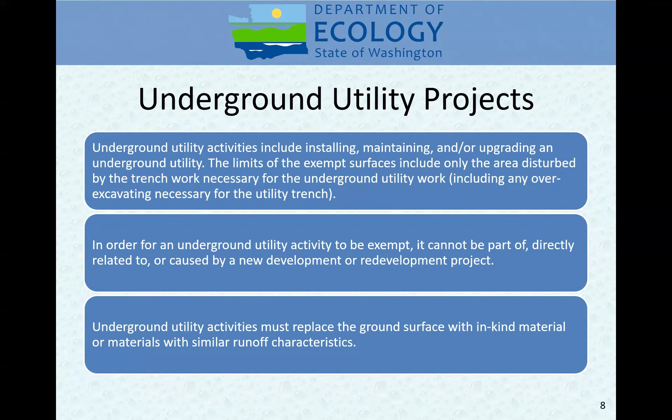So it must be the project all by itself, and it must replace it with in-kind surfaces—you can't put a trench in a gravel road and put asphalt back over the top. You probably won't do that, but it has to be in-kind. So there we are—that's my soapbox on underground utility projects. You can tell it's important to me.

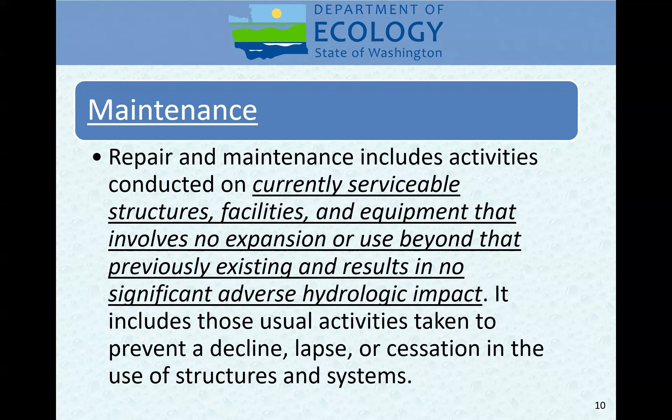Maintenance, you're taking care of existing problems in your surfaces, asphalt, concrete, whatever the surfaces are, but we're not increasing the size of anything. We're not doing anything new, we're not going down to base course and bringing the roadway back up. We're doing maintenance activities, making it so that whatever it is can last longer and work better by having this happen.

So what are these activities that we identify as being maintenance activities? These are actually listed in the manual. This is a copy of the bullet points we have listed in the manual: pothole patching, square cut patching, targeted preservation work, overlaying, including grinding and overlaying, so long as the base course

is not exposed. So if you want to grind 6 inches of asphalt down 2 inches and replace the top 2 inches, that's maintenance. You can do that from curb to curb. You can't extend it any - that's not maintenance. But you can go from curb to curb with that. You can overlay it.

Shoulder grading - if you have a road with a shoulder and you need to grade it, that's fine, you don't have to do anything else. Reshaping, regrading drainage systems, including curb and gutters, crack sealing and maintenance, and vegetation maintenance within the right of way.

We've also done a little expansion - when you're doing square cut patching or grinding and overlaying, if you're doing these maintenance activities and coming up against corners that are currently curbs, and you need to, because you're under a federal, state, or jurisdictional mandate, to replace the existing curbs with ADA curbing, you can do that ADA curbing as well. We consider that part of the pavement maintenance.

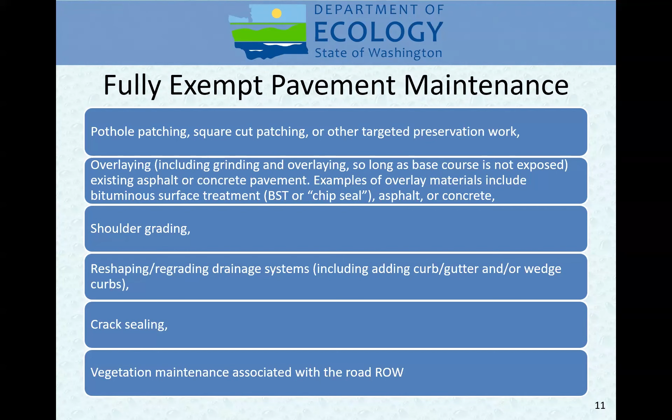I'm sure there's going to be questions about this. So, pavement maintenance subject to core element number 2: removing and replacing concrete or asphalt roadway to base course or subgrade or lower, without expanding the impervious surfaces, and repairing the roadway base or subgrade. These are not fully exempt, these are partially exempt - you need to do core element 2 when you're doing this.

So you can go into a road and from curb to curb, take it down to base course and replace all the asphalt from curb to curb and move forward. That's still considered maintenance in Eastern Washington. In Western Washington, that's replaced impervious surface, but in Eastern Washington we still consider that to be maintenance. So you can go down to base course and rebuild the road, but you can't expand it.

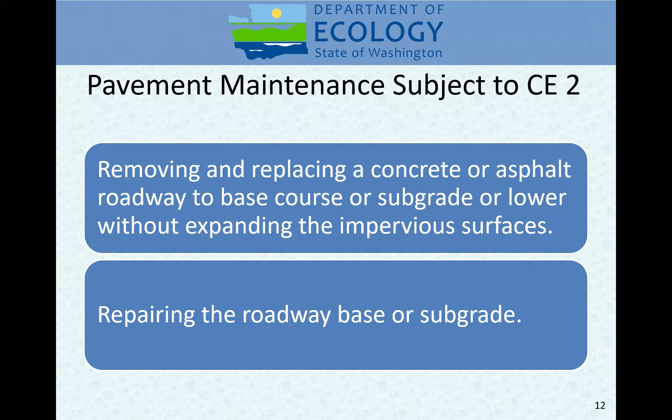This is the idea that the road is in such bad shape that square cut patching and other methods just aren't going to work. The existing asphalt is only an inch or 2 inches thick, and grinding isn't going to work - you're just going to have to take it out. Well, we're still saying that's maintenance for you. You still have the ability to do that as maintenance, except you need to do core element number 2 while you're doing that.

Other pavement maintenance items subject to core element number 2: overlaying existing gravel with asphalt or concrete without expanding the area coverage, or overlaying BST with asphalt without expanding the area coverage. So what you're doing here is taking an existing road that may be gravel or BST, and replacing it with asphalt, a surface that is much more impervious.

I know we call gravel impervious, and there's all kinds of complaints about that, but gravel is impervious because we're looking at the future when the gravel has been torn up and broken. The way runoff from gravel roads gets away from the right of way, and the way runoff from impervious surfaces like asphalt gets out of the right of way, is different. So we want to make sure that if you're changing the runoff characteristics to that extent, you're doing appropriate stormwater controls for those things. You can do that if your roads are subject to traffic volumes that are low enough.

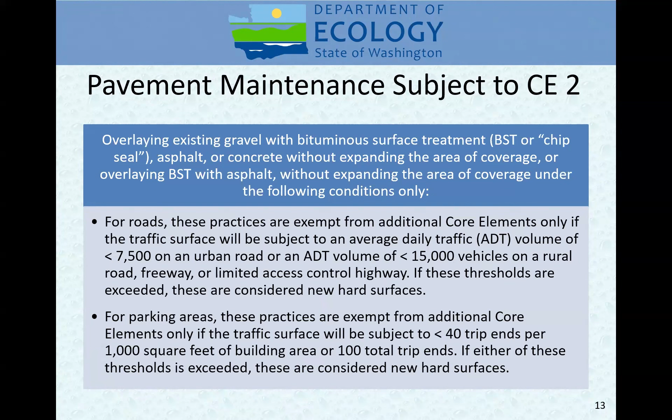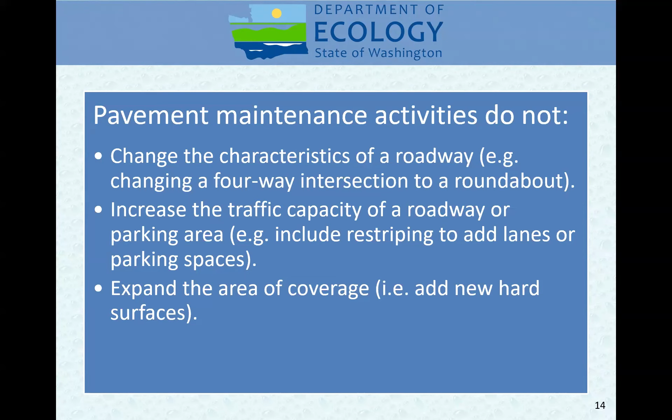Now, what do maintenance activities not do? They don't change the characteristics of a roadway, like changing a 4-way intersection to a roundabout. They don't increase the traffic capacity of a roadway, and they don't expand the area of coverage. So if somebody has a project and they are doing one of these things, you'll know they're not maintenance.

All right, so let's talk about thresholds. Yay, project and core element thresholds. As I said before, we've eliminated the regulatory threshold. We established a new redevelopment boundary when you go from new to redevelopment at 35% impervious on the site. We're establishing thresholds using hard surfaces now, and we've got some secondary core element thresholds that we're bringing into play now that we didn't have in play before.

So when you're looking at a project and you're wanting to go through the flow charts and determine what core elements you have to meet and what surfaces you have to meet them for, they're going to be very different under the 2024 permit and manual than they were under the 2019 permit and manual. So let's get into some definitions here.

Hard surface is an impervious surface, a permeable pavement, or a vegetated roof. I talked about that earlier, that we're trying to make sure people don't try to sneak out of exceeding the 5,000 square foot impervious surface threshold by putting in permeable pavement. So now we've got a catch-all of hard surface and replaced hard surfaces. These definitions again are in the glossary. If you don't want to come to this presentation, but you want to go to the glossary, that's where I suggest you go.

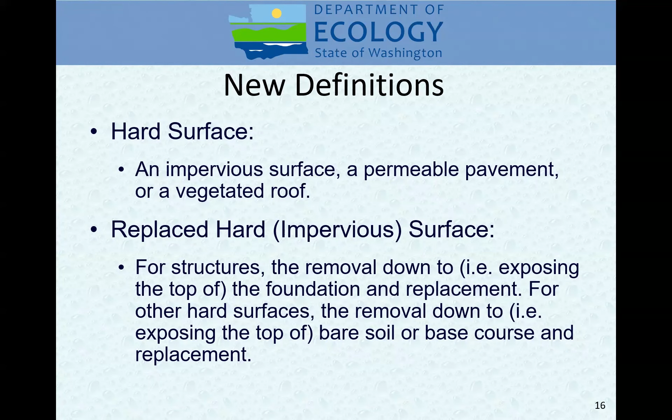Because of the maintenance definition there of replacing hard surface and only requiring core element 2, we're not trying to make things complicated, but we want to make sure you know what these definitions are. These definitions are going to be at the flowcharts, and they're going to be numbers that you have to generate as you start doing your project, so you can go through the flowcharts and determine what core elements you have to meet.

So here's the new development flowchart. It's revised from what you saw before. It's pretty straightforward. The first question is, does stormwater runoff from the project site discharge to a class 5 UIC well?

And all is the key term here. If your project sends all the runoff from your project site to a class 5 UIC well, then you need to follow the UIC rules. You need to go to chapter 5 of the manual and follow those rules, and you don't need to follow the permit. You don't need to go through the thresholds. You don't need to go through the core elements. Everything you're doing is under the UIC rule.

You're putting in treatment under the UIC rule, and you're registering your UICs under the UIC rule, and you're meeting all of the non-endangerment standards, and you're meeting all the requirements for deep UICs if you have a deep UIC, and all the other requirements that are in the WAC for UICs that aren't there for a permit. I have a little bit of discussion later about why we're doing this.

So if you answer no to that question, and you're not putting 100% of the 100-year storm into UICs, then you're going to be covered under the permit and have to do the core elements.

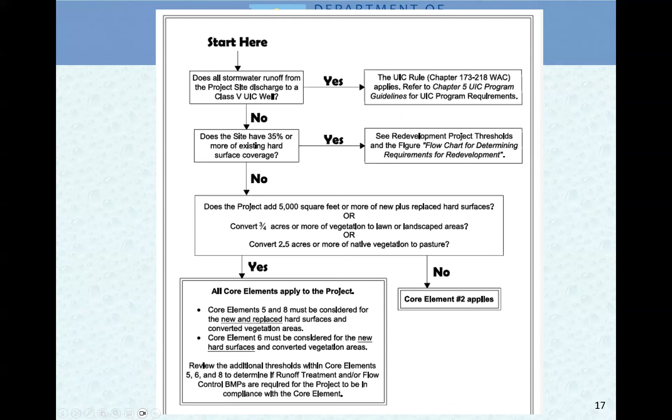The first question on the other flowchart—going back—was new and replaced hard surfaces. What we're doing on the redevelopment flowchart is we're only asking about new hard surfaces up here, so it's a little different. If you answer yes to that, you get the same answer here, only you have to do steps 5, 6, and 8 for the new hard surfaces and converted vegetation areas. Previously it was new and replaced for 5 and 8, and new for 6. Now it's new for 5, 6, and 8, and it doesn't say anything about replaced there.

What we're going to do with the rest of this flowchart, beyond this question and this answer of no, is decide whether we have to do flow control and treatment on the replaced hard surfaces. Again, we're trying to get people to do infill, and if they don't have to do flow control for the replaced hard surfaces, that makes their stormwater cost less and makes them more likely to want to build internally.

So the next thing we do is look to see: do I have a road-related project? Let's assume it's a subdivision or commercial development, so I answer no there, and look at whether the new plus replaced hard surfaces are 5,000 square feet or more. Now we've added replaced hard surfaces to that question above, so we might have answered no to this one but yes to this one, or yes to this one down here.

And does the value of the proposed improvements exceed the assessed value or replacement value by 50%? Have they made that site more valuable? If all they're doing is replacing asphalt in a parking lot, they haven't made it more valuable—why would we ask them to do stormwater controls on a surface that's still the same as before? We don't want to make them do that. But if they're putting a building on that site and it becomes more valuable, we want them to do stormwater controls there. So we're asking, have we increased the value of the site by a certain amount?

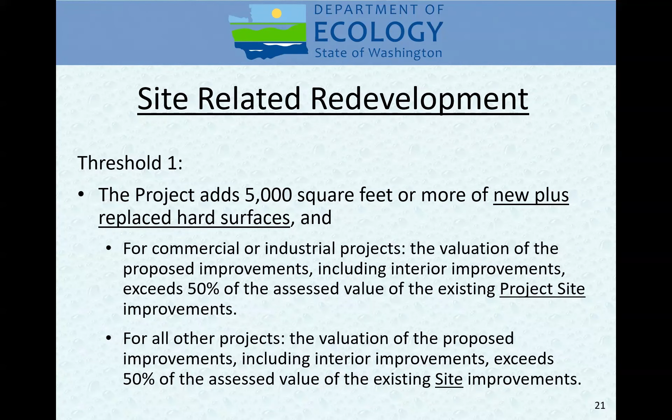This is what that first box was asking us: do we have more than 5,000 square feet of new plus replaced? So if we only had 3,000 square feet of new and 3,000 square feet of replaced, we answered no to that first one, but now we're answering yes. And if we answer yes to this, we go back and we have to do 5 and 8 for the new and replaced, and 6 for the new.

Threshold number 2 was that bottom box, and now this is for commercial industrial sites. Are we adding more than 5,000 square feet? And does the new plus replaced total 50% or more? You've got to do both. And if we do both, then we've added 5 and 8 to the new plus replaced.

That's taking us through those boxes in the flowchart. So each time you hit a box in that flowchart, you now have to determine: do I meet what's in this box or not? And if I do meet what's in that box, I have to add something.

Let's go back to the flowchart. So I come down to this box, I'm down in this box. Do I meet both of those things? If I do meet both of those things, I'm coming down here and I'm adding replaced hard surfaces. I've already got the new hard surfaces up here, or I may be going here and missing that, but now down here I've got yes, I have to do both the new and replaced for 5 and 8, and the new for 6.

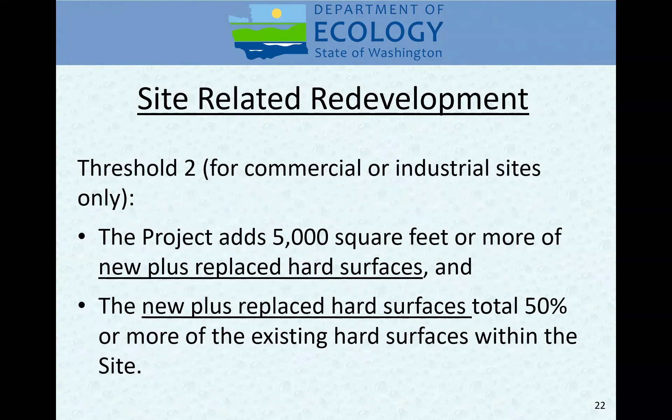So for road-related projects, if they meet both of these thresholds, I've got to do core elements 5 and 8 for the new and replaced, and core element 6 for the new.

There's a lot of new stuff for you to deal with, to decide whether your heads are up for it today or not. It's very confusing, it's very new to you. It's been in place on the west side of the state since 2001, so they're very familiar with this, and we still get questions of how to follow the flow chart fully. So it's not something you can pick up in a day. It's something you have to look at every single project individually. There's no generalization here. These are very specific, and you have to look at the numbers for each project.

So this is something the design engineers are going to need to get used to, because they're going to have to start building in their report these tables of types of surface and the amount of those types of surface. They no longer have just, am I bigger than 5,000? Yeah, okay, I got to do it. Now, depending upon how big you are and where you are and what you're doing, you may very well have to do different things, and you may be bringing in different things.

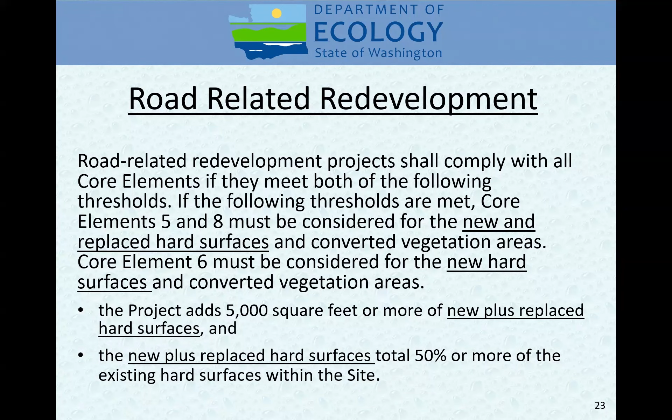Okay, so let's get away from those thresholds. Let's set those behind us and pretend we all understand them completely and don't have anything else to do with them.

So let's talk about our new core element 8. Core element 8 is on wetlands. Ecology has a group of people in the section, the shorelands and environmental assistance group, that are focused on wetlands. And they have told us that we need to start looking at wetlands across the state to deal with impacts on wetlands of new and redevelopment.

So we have elected to do that through the generation of a new core element 8. And if you remember what we talked about in the thresholds, core elements 5, 6, and 8 - for 5 and 8 you need to do new and replaced hard surface, and for core element 6 you only need to do new.

So we've brought that into the threshold calculations. And what we've done to help people figure out how to deal with wetland protection is we've created a new appendix, 2D in the manual, discussing wetland protection guidelines. Some of the standard guidelines you need to be aware of at all times: there are wetland buffers, and the buffers change size depending upon the value of the wetland. Buffers can be as much as 200 feet in some cases, depending upon the value of the wetland.

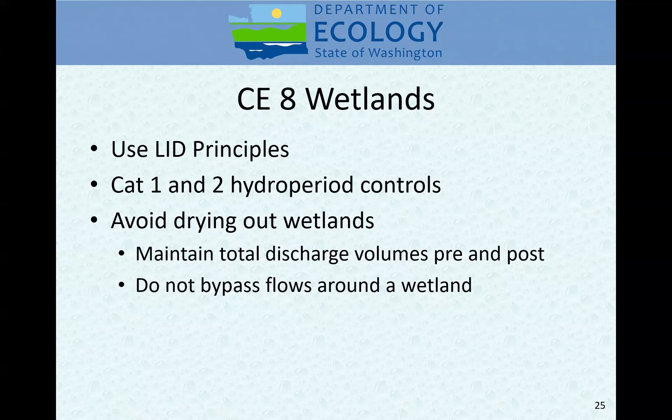There's some other things we wanted to talk about. In the manual, we don't have strict guidance for these things yet, but we want to let people know that we are aware they're happening and we are doing things about them. One of those things is climate change. We are aware of climate change, and we don't know what's going to happen, what climate's going to be like in the future.

So we are working with the University of Washington to see if we can get help identifying what rainfall is going to look like in the future, how much rain we want to get for various return events. We've just started a contract with the UW climate people to take their projections—they've made a number of rainfall projections based on different assumptions about the ozone and the climate and how things are going to change—and we're asking them to take their big projections and make them smaller ones so they can relate to Eastern and Western Washington.

What we're putting in our recommendations at this point is that we're asking jurisdictions to begin thinking about preparing for more extreme events. We're not telling them what size that extreme event should be—we're asking UW to help us determine that. It's not our place yet to do that; Ecology doesn't have enough knowledge to do that.

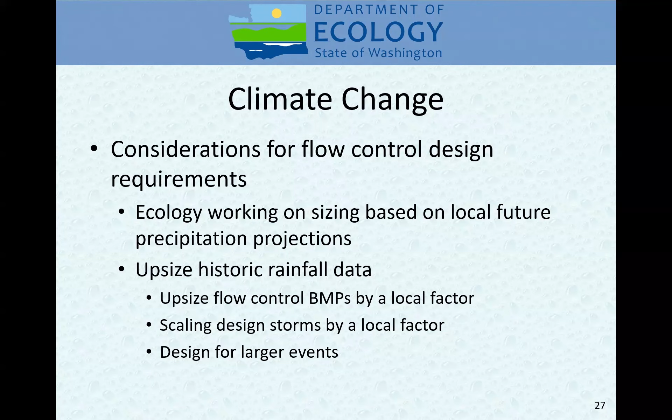We're getting it developed statewide all at once, so we will be able to release everything at one time. DOT will have their information statewide at the same time as everybody else gets theirs. So climate change, we are working on it. I don't know when we're going to have an answer, but we are working on it. Our contract with UW is for 2 years, so I wouldn't expect much in less than that.

We also are discussing nutrients and toxic organics. They're big in the news today. 6-PPD and 6-PPDQ is very big in the news, killing Coho salmon. It's nationwide, it's ubiquitous, and it's everywhere. A lot of parts of the country don't really care about it right now because they don't see it as toxic to the fish species that they have. However, it is toxic to those fish species, whether they believe it or not. So most of the country isn't jumping on the bandwagon quite like Washington State is.

We've got lots of studies going on. We're trying to determine how to deal with it. We just don't know enough about 6-PPD to say what we can do about it. We have no idea what concentrations we should be expecting from different land use types, or what concentrations of 6-PPDQ we should be removing in order to protect aquatic life. We don't know what BMPs can treat it and how well they can treat it. So we can't really say you must treat for 6-PPD and then say, oh, well, we don't know what you can use, but you've got to do something. That's not fair to you. So we're trying to figure out how to give you the correct tools, tell you what tools there are, and how to size and use those tools appropriately.

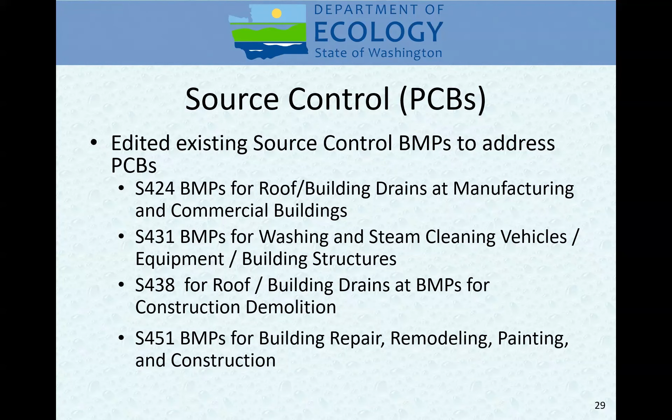We have a high performance bioretention soil mix that was identified and developed in the early 2020s. We put that mix in the emerging guidance at that point in time, and in the 2024 manual we brought that mix into the manual. We now have this in addition to the default mix for bioretention soil media.

It's for use when you have phosphorus issues with the water that has gone through the bioretention. If you don't have phosphorus issues, we suggest you use the default mix—it's much less expensive and much more available on the east side of the state. We've been trying to obtain HPBSM in Spokane for a grant project and have had a great deal of difficulty, and it's much more expensive. So at this point in time we don't recommend you use it unless you absolutely have to, but it is in the manual.

The bioretention BMP section of the manual contains the information you need to design a bioretention facility, regardless of what media you're planning on using. All the media use the same default infiltration rate, same reduction factors, same sizing, same slopes. They all use the same design criteria, regardless of which mix you have.

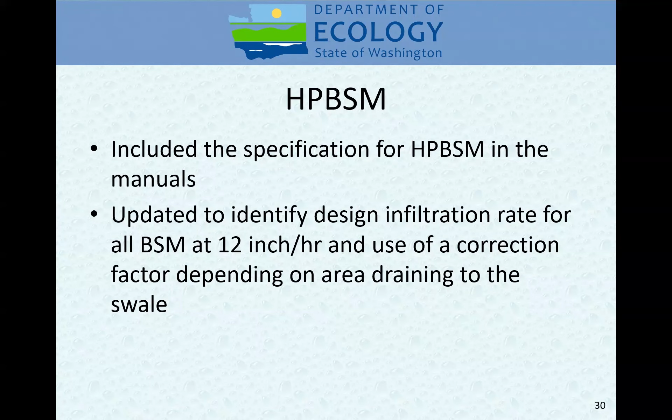And then in our UIC, we've added much guidance for UIC. We've updated it a lot for clarity, and we've added language for deep UIC wells. Deep UIC wells are wells that are poked through a confining layer, not necessarily 20 feet deep. If there's a confining layer 4 feet below the surface and you poke your UIC through that into the aquifer underneath, that's a deep UIC well. And there are a lot of new requirements for that.

And those requirements, the language of those requirements, were negotiated through the Association of Water and Wastewater Districts. So we've confirmed with the Association of Water and Wastewater Districts and Department of Health that the language we're putting in there, they consider protective.

So questions on that last little bit of changes, and from here I'm going to go talk about UICs. Underground injection controls are governed by WAC 173-218.

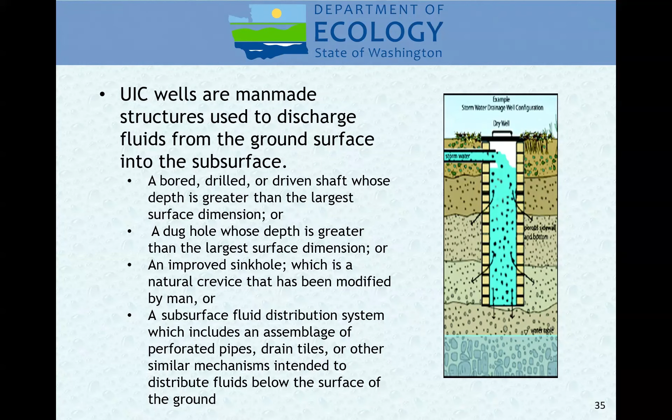If it doesn't have a perforated pipe in it, it's not a UIC. So if you have a trench filled with sand, and a pipe coming to it that stops as it enters that sand trench, water moves through the sand slowly, driven by the head developed at the end where the pipe comes in. That's not a UIC and doesn't need to be registered. But if you have a perforated pipe in there that takes water the entire length of the trench and uses the entire length for infiltration, you then have a UIC.

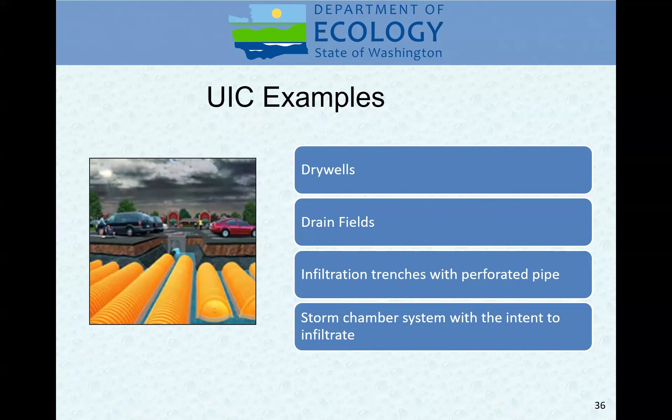Typical UICs are dry wells, drain fields, infiltration trenches with perforated pipe, and storm chamber systems with the intent to infiltrate. So these chambers, if you're using them for infiltration, they are considered UICs. If the ground is such that you can't infiltrate, and these are being used for storage as a detention system, these are not UICs. You have to be doing infiltration in order for these to be UICs.

Not UICs: buried pipe or tile networks that collect water, like an interception drain. So you have high groundwater on a site, and you're building a building with a basement, and you want to intercept the groundwater before it gets to that basement. You put a trench in the ground, fill it with sand, put a perforated pipe in that, collect the water you've intercepted, and drain that to the surface. That's not a UIC. Water's going the wrong way. A UIC requires water going into the perforated pipe and then into the ground. If water's coming from the ground into the perforated pipe and out to the surface, that's not a UIC.

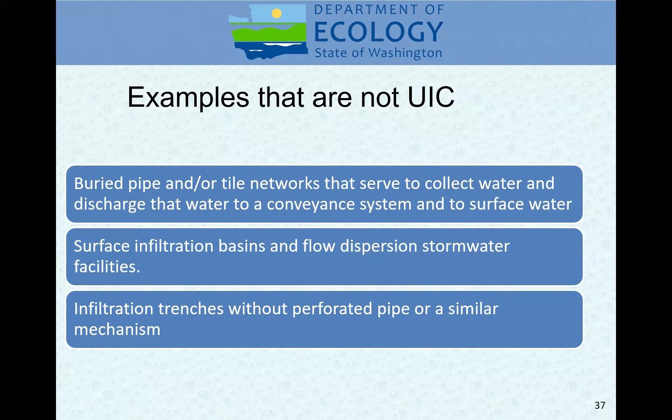A surface infiltration basin, or infiltration pond, has surface dimensions larger than its depth, so it's probably not a UIC. And if you don't have a perforated pipe in the infiltration trench, you don't have a UIC.

We manage stormwater here in Washington State one of two ways: through the NPDES Municipal Storm Sewer MS4 system, and/or the underground injection control. The UIC program manages infiltration of various liquids being put into the ground, not just stormwater. Our interrelationship is with the UIC program's class 5 UIC wells, as opposed to all of them. So UIC covers many more things than just stormwater, and the two programs do overlap.

The UIC program states that you should get the design, construction, operation, and maintenance information from the stormwater manual to fulfill their AKART requirements - all known available reasonable treatments. The requirement is to meet AKART, and if they use the BMPs in our manual to meet the UIC rule, then the UIC rule's requirement for AKART is met.

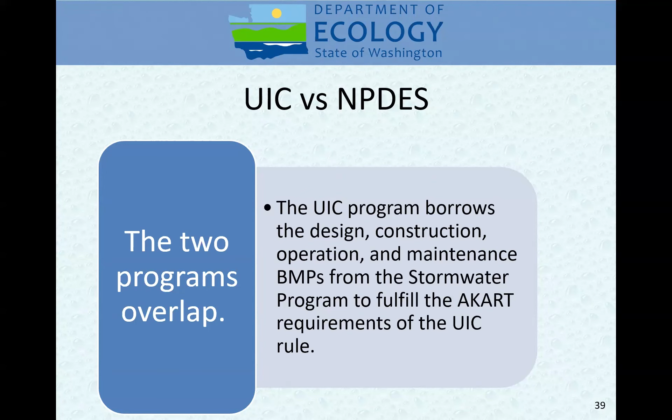Here's how we deal with the two of them in the permit, in section S2A of all three of our municipal general permits - the Phase 1 and the two Phase 2s. We identify that this permit itself authorizes the discharge of stormwater to surface waters and groundwaters of the state from MS4s owned or operated by each permittee. Section S1A lists all the permittees, all the cities and counties covered under this permit. So it's authorizing discharge from the MS4 to waters of the state.

Right next to this, in the very next paragraph, it says that discharges to groundwaters of the state through facilities regulated under the UIC program are not authorized under this permit. So a jurisdiction, an MS4, has authorization to put water into surface waters through the permit, and they're authorized to put water into the ground in any manner but through a UIC. If water is coming from the MS4 through a UIC, that has to be authorized by the UIC program, hence needing to submit the UIC for approval and authorization.

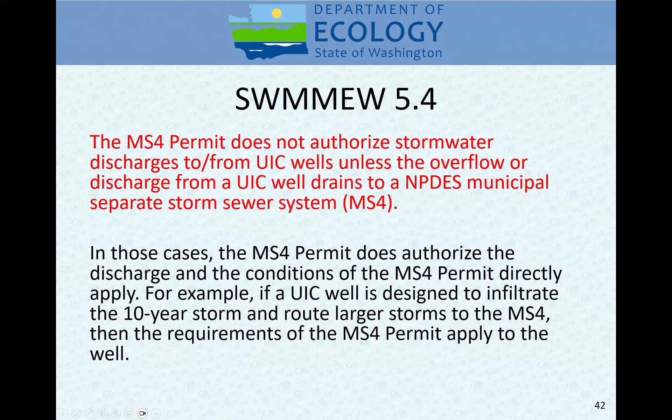So now the MS4 needs to have the permit authorization for the water going into the ground. So where do we deal with this? How do we deal with this? There's one other piece coming up in the

Eastern Washington Manual, in S5B5 paren 2 of the Eastern Washington Manual. It says that all permittees shall require projects approved under S5B5, which is the post-construction BMP section of the permit, to retain the 10-year 24-hour rainfall or a local equivalent on site.

So here's where you will probably be using a lot of UICs. If nothing else, you'll put a UIC to retain the 10-year 24-hour rainfall event. But that's not all the rainfall that's going to fall. So you'll have to register that UIC with the state because it's a UIC, but you'll have to follow the permitting rules because you haven't kept all runoff on site through UICs.

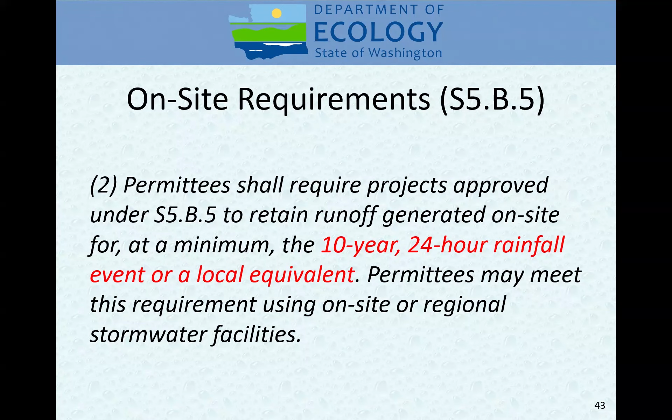And Ecology had to come up with a definition of what we mean by all. We're not going to require that you meet all the rainfall from the largest possible storm. Now we've had these hurricanes hitting down in the Southwest with a lot more rain than anyone ever designs for. Well, we could have that. We have these occasional atmospheric rivers that come through, and the amount of rain we can get from an atmospheric river may be larger than we would really want to design for cost effectively.

So Ecology came and said, well, what are we going to consider the storm that you have to design for? That if you design for this storm and all the water from this storm goes into the UICs and no discharge off site from that project, you are under the UIC rule and not under the permit. And so we decided that storm would be the larger of the 100-year 3-hour or the 100-year 72-hour storm.

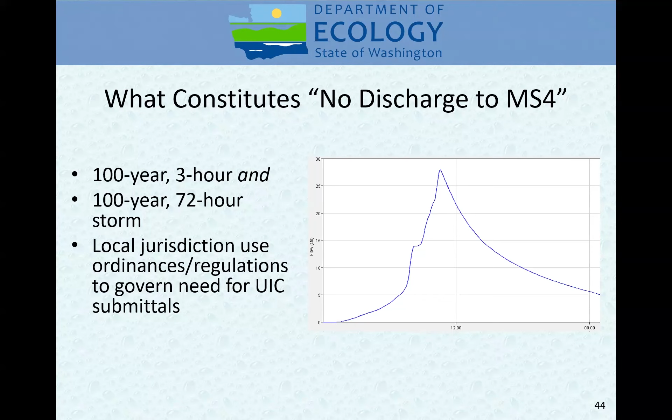So there's a volume amount in each of those storms, and whichever one's larger, that's the one we're asking you to size the UICs for. And if the UICs can handle that amount of water, you go up to the flow chart and you answer yes, all the water in the UIC is going to UICs, therefore I'm under the UIC rule and I'm no longer under the permit. If you can't answer that question, then you're under the permit.

And what we're trying to do is protect groundwater. So by protecting groundwater, we're asking for there to be a separation between the base of the well and the top of the groundwater table. The groundwater table is defined as the seasonal high water, which quite often on the eastern side of the state is during irrigation season. On the western side of the state, it's during winter, but on the eastern side of the state, it's during irrigation season. So we're asking you to determine the seasonal high groundwater level.

We're asking you to install BMPs for treatment and source control prior to going into the UIC, to not do any prohibited discharges from the UIC program, to meet your local ordinances, and register your UICs. So if you're going to be using UICs on your project, if you're going to be putting all runoff into UICs, we're asking you to look at these things.

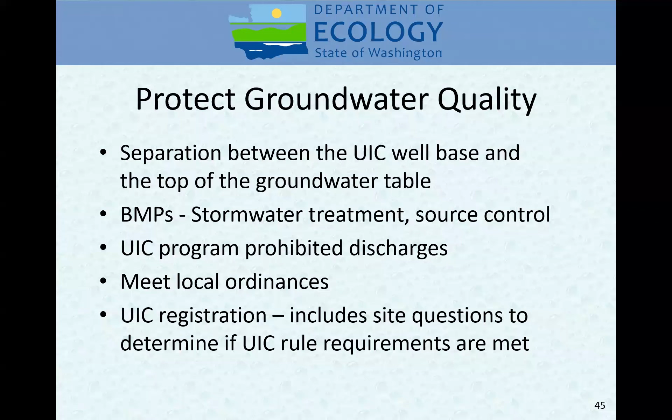The separation between the UIC well base is called the vadose zone, and we're going to be asking for vadose zone treatment capabilities. So once you're under the UIC rule, the thing you need to do beyond registering it is provide some sort of treatment prior to putting water in the UIC. So how do we determine what that is?

We have a 3-step process. Step number 1 is we look at what kind of pollutant loading we're going to have, and we rate that on low to high.

That's typically based on average daily traffic. We think that traffic is the major cause of pollution here. We also want to know what kind of treatment you can get in the vadose zone, the unsaturated soil between the bottom of the UIC and the top of the seasonal high groundwater table.

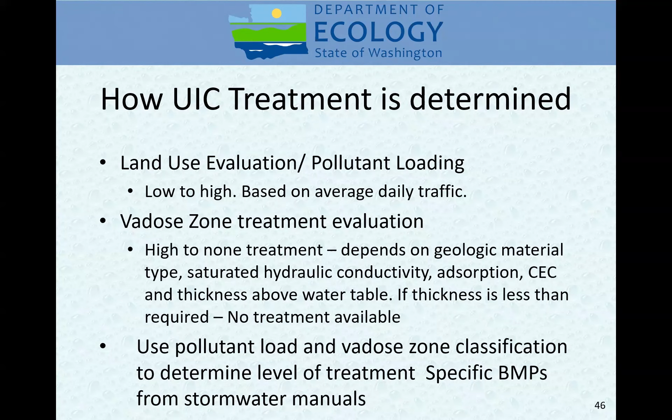And that gets graded on a high to none. Then we use the pollutant load and the vadose zone classification that we just determined to determine the specific BMPs necessary. Each of these has a separate matrix. So our first matrix looks at vadose zone capacity, ranging from high to low, or high to none, when you get down there.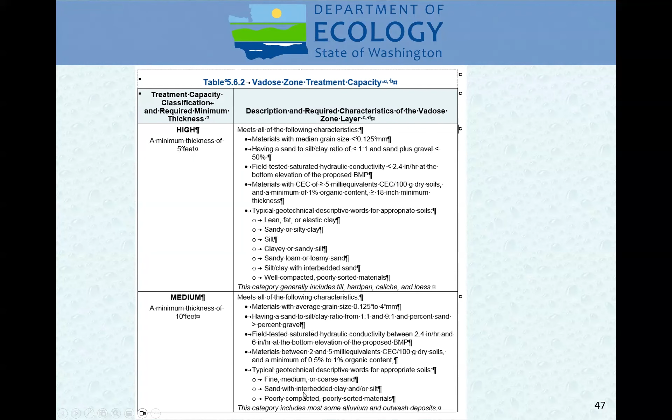Typically what we want is for you to look at those first four. You're going to identify which one applies. If it doesn't meet the correct characteristics of one, you go to the next one. If it doesn't meet that, you go to the next one, and you find the one where it meets.

Then we're going to look at the area contributing to the UIC. We have insignificant loads - those are places where there's no pollution, no vehicles are there, unmaintained open space, that's insignificant. For low, we have numbers for parking areas and other land uses with more trip ends, more use, and then for high, we have high use sites.

High use sites are defined in the glossary. So you don't just say, I don't know what a high use site is - go to the glossary and read what we're calling high use sites. There are specific land uses, specific trip ends, specific industrial sites identified as high use sites. You go through these and identify which one your project site is in.

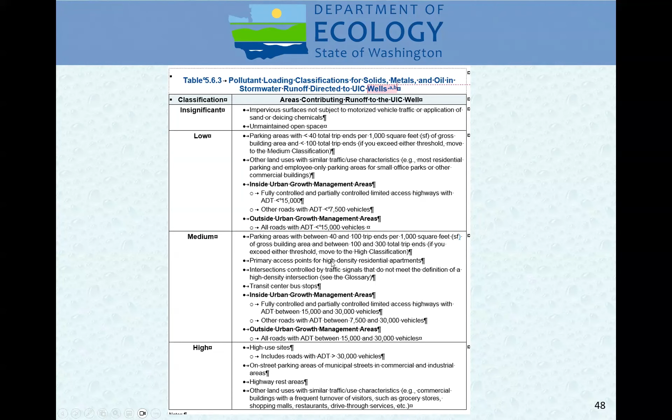If it's not low, and it's bigger than those 40, go down to 40 to 100. Once you find out those two numbers, you go to table 5.6.4 in the manual, and you find your treatment capacity and your pollutant loading, and you look to see what kind of treatment you have to have prior to going into the UIC.

These little A's, B's, and C's are footnotes that I don't have on this slide. Those footnotes say that a two-stage dry well is a catch basin with a downturned elbow. Pre-treatment BMPs have met the pre-treatment criteria - they're hydrodynamic separators. And removed solids are treatments that have met the requirements for basic treatment, TSS removal.

Note we don't have metals treatment in this, we don't have phosphorus treatment in this, because water's going into the ground, and we're not requiring metals treatments there for streams and protecting fish in streams. And in the places where it says remove oil, you don't need to remove oil from the entire site - you need to put the oil treatment BMP near where the potential for oil spills is likely.

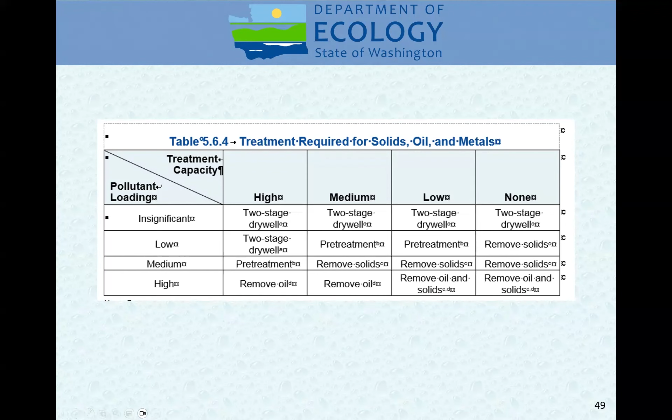They both require that you do an assessment. You make sure that you have a well assessment for that UIC, you have O&M and outreach and education for that UIC, that you have a construction SWPPP when you're building it, and you have a stormwater management plan for that. Now, the UIC rule allows jurisdictions to use their general system-wide, MS4-wide stormwater management plan to identify what they're doing for their UICs, but they need to include the UICs in the stormwater management plan.

If jurisdictions have municipal UICs, they must design, construct, operate, and maintain all new UICs according to the guidance in the manual. They must conduct a well assessment for each existing UIC, and conduct a stormwater site plan for the area served by each municipal UIC. So you still have to maintain them, and operate these UICs in accordance with what's in the MS4 or in your permit. It's just the amount of treatment prior to the UIC and the fact that a UIC gets registered with the state.

What's a well assessment? You've got to identify potential risks, look at the land use, the local geology, the depth of groundwater. Are you in a groundwater protection area? Is it a deep UIC or not a deep UIC? You have to look to see if it's a potential threat to groundwater. And if there's a water purveyor who uses groundwater for that aquifer down gradient from your well, and you're in their groundwater protection areas, you need to converse with them to talk about what you're doing and find out what they want and what DOH wants in place to help identify if there's a potential threat to their groundwater.

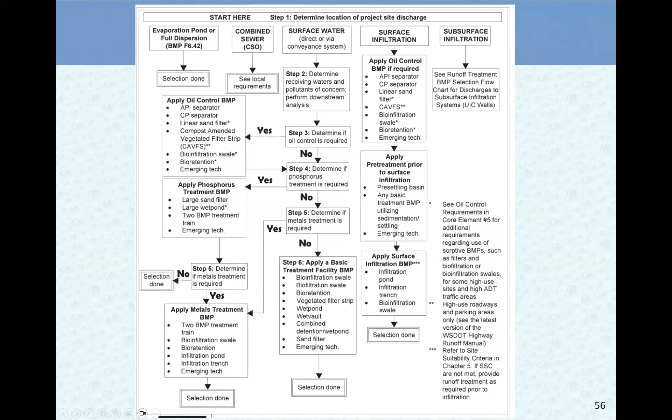If you have to treat, we've given you a way to calculate what your flow rate is or your volume is. We've given you 5 methods to determine the design volume. We've given you 3 methods to determine the design flow if you're doing this before detention. And if you're putting your treatment after detention, we've told you how to make it.

Now, these are all approved by Ecology. What most jurisdictions have done, and what I suggest you do if you're a jurisdiction and haven't done this, is select one of these methods so that everybody who submits to you is using the same method. You're not having to learn different methods and determine if those methods are okay or not, and if those volumes or flows are okay or not. So we suggest you pick one of those methods.

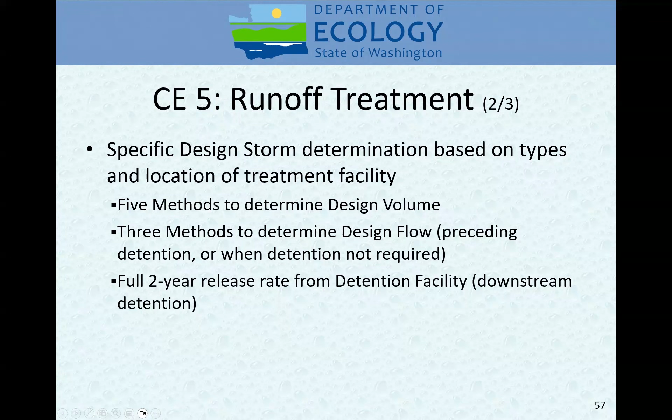Now, if you have to do core element 6, there's a secondary threshold there as well. And the threshold is 10,000 square feet of total impervious surfaces, or a 0.15 CFS increase in the 25-year, 24-hour event over existing conditions.

10,000 square feet of new impervious surface gives you about a 0.15 CFS increase in the 25-year event. We picked this larger number because flow control tends to be large and take up a lot of space. And if it's less than this, there's not really much of a stormwater impact. So we're not forcing people to do flow control on these smaller projects.

So you could have had a project with 8,000 square feet of new and replaced impervious surface, and it told you to come here to core element 5 and core element 6. Core element 5 said 5,000 square feet of pollution generating impervious surface. That 8,000 square feet could have been made up of 5,000 square feet of a building and 3,000 square feet of parking. So you didn't have to do treatment because you were less than 5,000 square feet of pollution generating impervious surface, and you didn't have to do flow control because you're less than 10,000 square feet.

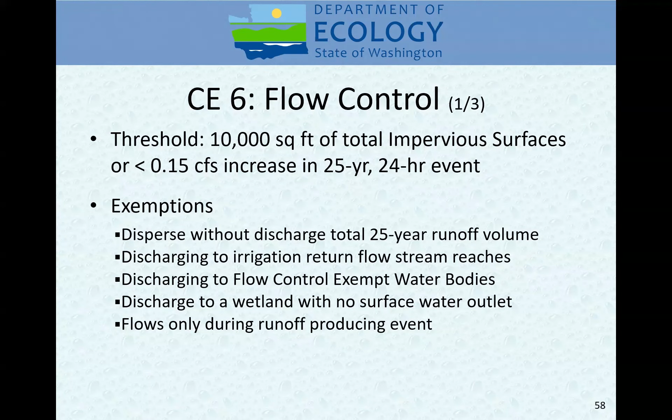For flow control, Ecology would prefer that you use infiltration. We don't want water coming out on the streets, and we don't want water in the MS4. When you do have to meet flow control, we want you to retain the 10-year 24-hour event on site without discharge. That's the permit requirement. We also want you to limit peak developed flow rates to 50% of the pre-developed 2-year peak and maintain the pre-developed 25-year peak rate if you're discharging off-site.

So if you're going to be discharging off-site using detention of some sort, you need to run a model that takes the 2-year and 25-year rainfall, run those simulations through the model that includes your detention facility, and then report the pre-developed and post-developed rates to make sure they match.

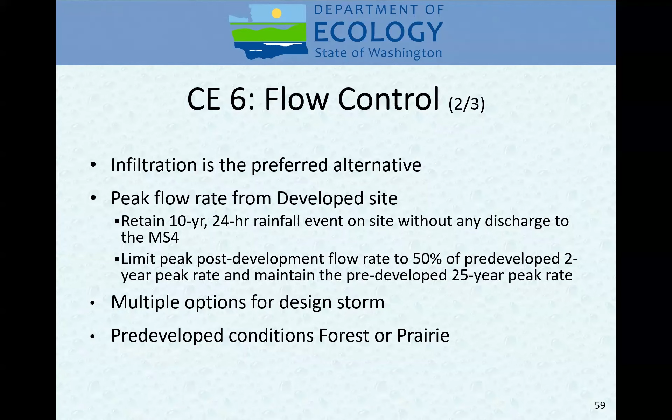There are multiple options for your design storm. When you're doing pre-developed conditions, it's forest or prairie. There should not be any impervious surface, and there should not be any landscaping in your pre-developed analysis when doing this detention analysis. I want to make sure that's not happening.

Conveyance is not discussed in the manual. We don't talk about how big pipes should be or what size storms you should deal with. DOT has a lot of discussion about pipe sizing in DOT facilities, and many jurisdictions have identified their own pipe sizing requirements. Some want the 25-year storm without surcharging, others want the 10-year storm with surcharging allowed up to the top of the catch basin, and others want the 100-year storm with or without surcharging.

DOT actually allows surcharging to be half the right-hand lane. So if you've been driving down the highway in big rainstorms and wondered why you're in the right-hand lane driving through a lot of pooled water, that's because it's allowed by DOT. They allow the conveyance system to back up, but no higher than the midpoint of the right-hand lane.

If you're providing any BMP, you need to provide an O&M manual. Many jurisdictions already have O&M manuals for a lot of the standard BMPs. If you're doing one with proprietary technology, you probably need to get the O&M manual from the manufacturer and put that into your O&M manual. If you're putting in something for a privately owned operation, you need to give the O&M manual to the owner so they know how to operate it.